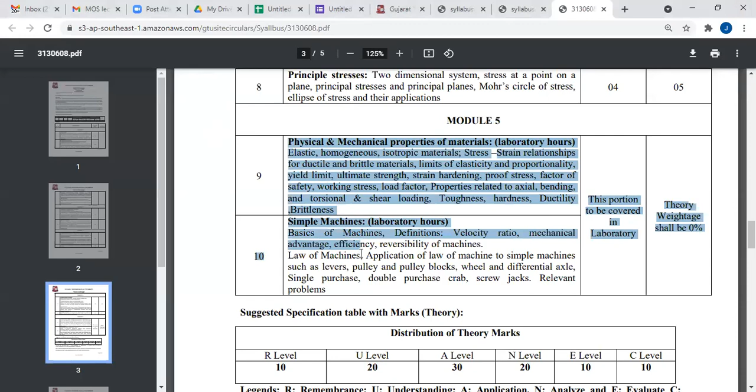So first, module number 5 is basically related to laboratory. How to conduct the laboratory works, that we will see later. Okay. So, fine. Let's see first of all module number 1. Before starting our subject, let's discuss the syllabus, so you know what you actually have to learn in this particular subject.

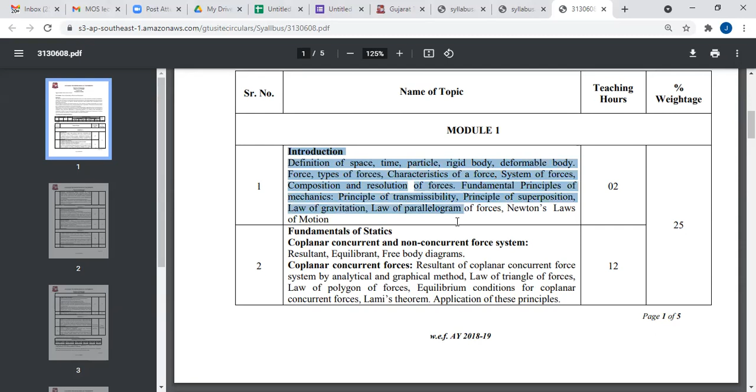So your module number 1 will cover the introduction part. What is force? What are the characteristics of force, system of force, and some basic principles. Clear? Second topic is your fundamentals of statics. It will be divided in 2 parts: coplanar concurrent and coplanar non-concurrent force system. So module number 1 basically covers the introduction part.

In that we will cover lots of definitions, and basically from this part 2 to 3 marks questions may be asked in the GTU examination. Module number 1, second part is most important: coplanar concurrent and coplanar non-concurrent force system.

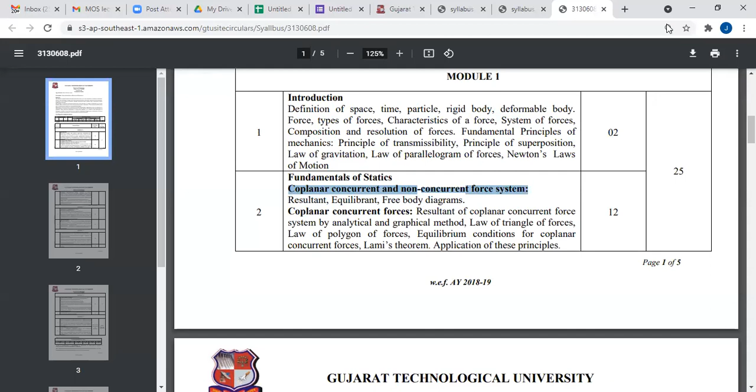Let me share the whiteboard. Is this whiteboard visible to all of you? Is this whiteboard visible to all of you? Yes, sir.

Now one more thing to all of you. Tuesday second lecture, that is MOS. Yes or no? Yes. Okay. Now Tuesday first lecture is my first offline lecture, and that timing is 9:45 to 10:45. And our lecture is also at 10:45. So we will not start our lecture at 10:45, but we will start around 10:55. Is it okay? Okay, sir.

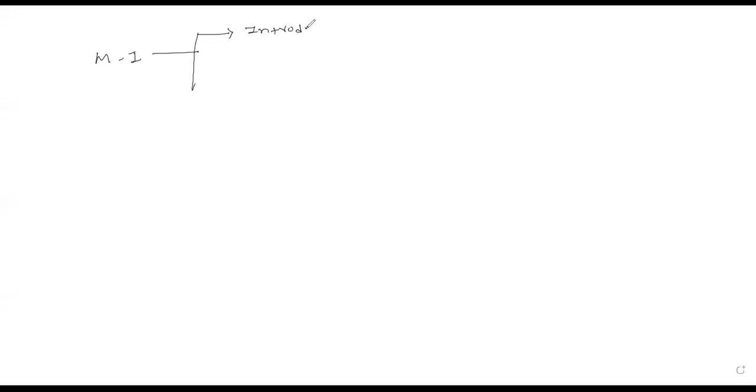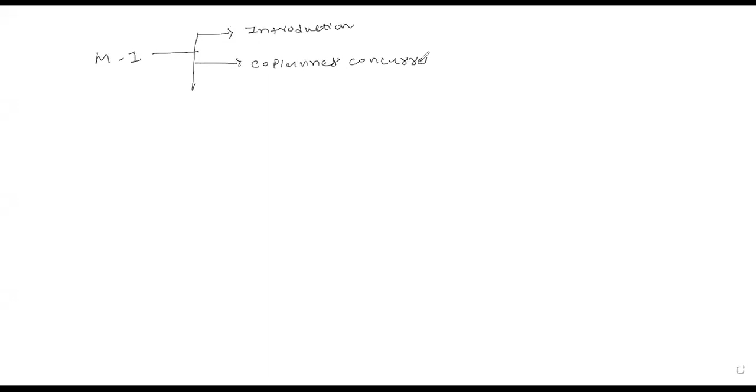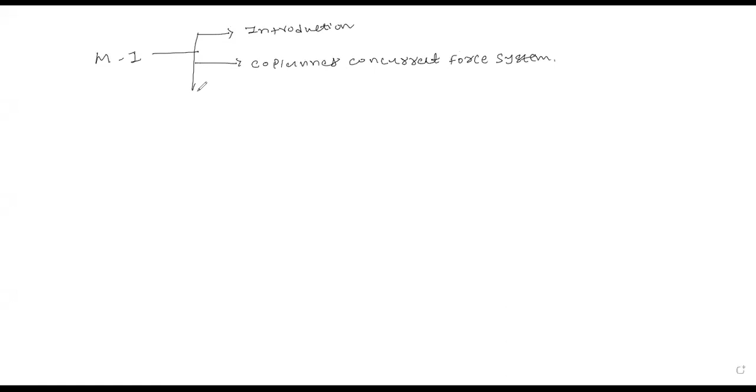Part number 1 is your introduction. Part number 2 is coplanar concurrent force system. And your part number 3 is the coplanar non-concurrent force system. Is it clear, students? Please confirm. Is it clear? Yes, sir. We have divided chapter number 1, or module number 1, into 3 parts.

Okay, whatever GTU says, forget it. So now, introduction basically covers 2 to 3 marks. No need to write. I will provide all the documents. Don't worry. No need.

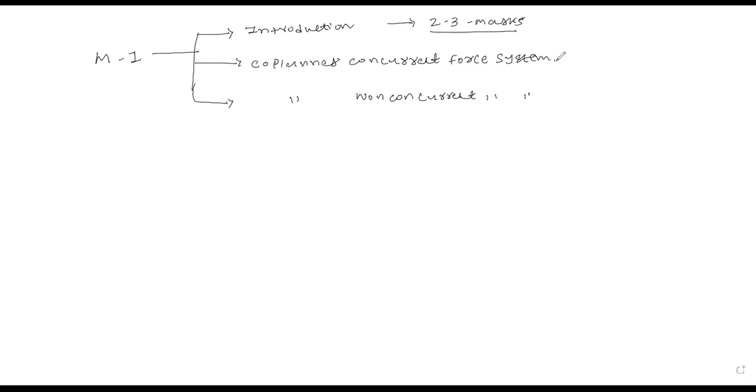Talking about coplanar concurrent force system, in coplanar concurrent force system we have many topics. So we discuss now only the topic names. Clear? First is the law of parallelogram. Second is the triangle law or law of triangle. Third is the resolution of force system. Fourth is Lami's theorem.

All 4 points are most important. You can ignore the triangle law because it's just like the law of parallelogram. So the most important topics are the law of parallelogram, resolution of force system, and Lami's theorem. Is it clear? Please confirm. Yes, sir. Fine. In coplanar non-concurrent force system, we have 2 parts.

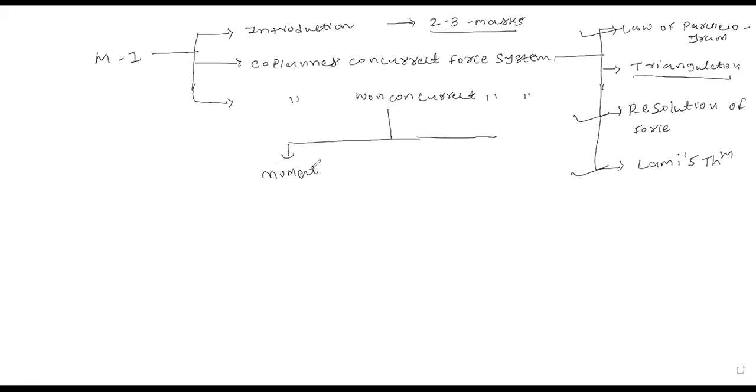First of all, we will learn what is a moment, what is a couple, and their difference. Questions are asked from this many times. Second, we will learn Varignon's theorem. That is nothing but your law of moment.

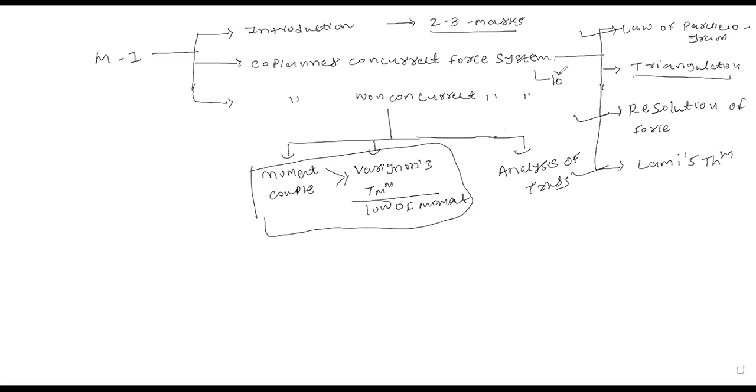So now, basically coplanar concurrent force system છે, એમાંથી 10 માર્ક નું પૂછાતું હોય છે. રેન્ડમ કહું છું, not a sure. ઓકે, અને આ બે ટોપિક માંથી બેઝિકલી બીજા 10 માર્ક નું પૂછાઈ શકે છે.

So now your total GTU paper is, તમારું GTU પેપર કેટલા માર્ક્સ નું હોય છે? 70 નહીં, ઓવરઓલ પેપર કેટલા માર્ક્સ નું હશે? ટોટલ પેપર વિથ ઓપ્શન 56? ના, ન્યૂ સ્કીમ ભૂલી જાઓ ભાઈ, જૂની સ્કીમમાં પાછા આવી જાઓ. આપણે જૂની સ્કીમ પ્રમાણે જ ભણીશું. પછી GTU ભલે વેટેજ ચેન્જ કરે, વેટેજ જ રહેશે, બરાબર.

નાઉ ક્વેશ્ચન નંબર 1, A B C 14 માર્ક નું હોય છે કંઈક આવું. ક્વેશ્ચન નંબર 2, A B, આ બધું 14 નું હોય છે. 7 7 7, yes or no? Yes sir. આવું ટોટલ પેપરનો માર્ક્સ નું સમેશન મારશો ને તો ટોટલ ક્વેશ્ચન પેપરમાં તમારા માર્ક્સ થશે 119 માર્ક્સ ઓપ્શન સાથે. ક્લિયર? ફોર એન એક્ઝામ્પલ ક્વેશ્ચન નંબર 3, 14 ની ઓરમાં 14 આવશે. ક્વેશ્ચન નંબર 4, 14 ની ઓરમાં 14, yes or no? Yes sir, 3 4 7 માં નથી જતો, બરાબર. અને સિમિલરલી ક્વેશ્ચન નંબર 5, 14 ની ઓરમાં 14, તો 28 28 56 56 28 કેટલા થાય? 84 84 પ્લસ 14.

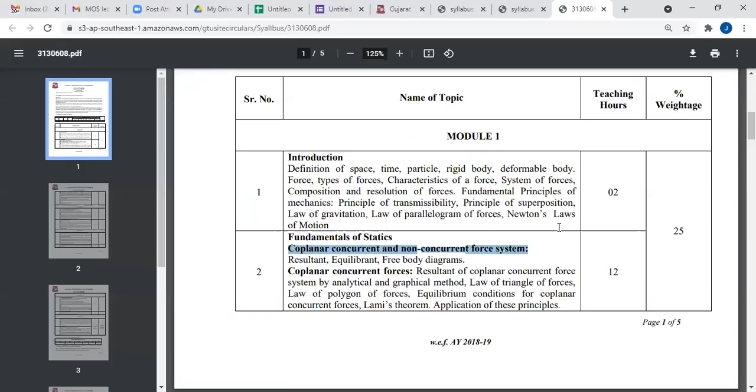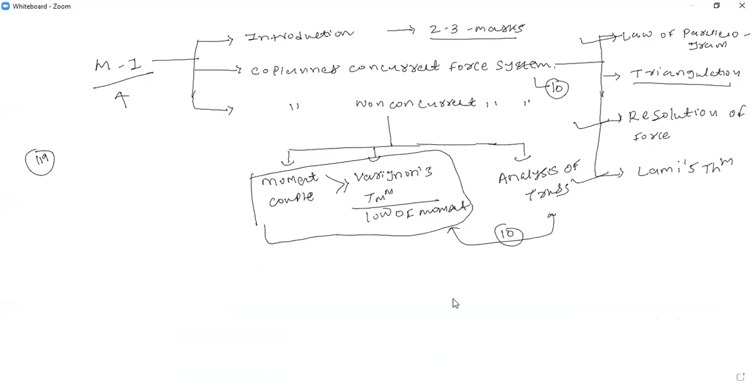Yes, clear? Now why I am discussing this, your module number 1 having some weightage, okay, as per GTU syllabus. Let's see that weightage. 25%, is it clear? Weightage is 25%. Clear? Okay yes sir. Now, 119, that means can I say that 120 marks? 120 cut 25%, that means કેટલું હશે? કરો કેલ્ક્યુલેટ. 30, 30 માર્ક નો આવશે, બરાબર.

So your module number 1 belongs to 30 marks. ટ્રસ માંથી ઘણીવાર સ્પેસિફિક ક્વેશ્ચન પૂછાય છે, so you can say here 7 to 8 mark question. So તમને 30 માર્ક મળી જશે આમાંથી. Clear? Please confirm me. Yes sir. Okay, so now this subject is basically taught by two faculty. One is myself Jay Patel, and second is Alpesh. That is 3 lectures with me, and 1 lecture is Alpesh. So now this module number 1 will be covered by me, આખું ટોપિક હું તમને સ્ટડી કરીશ. Is it clear?

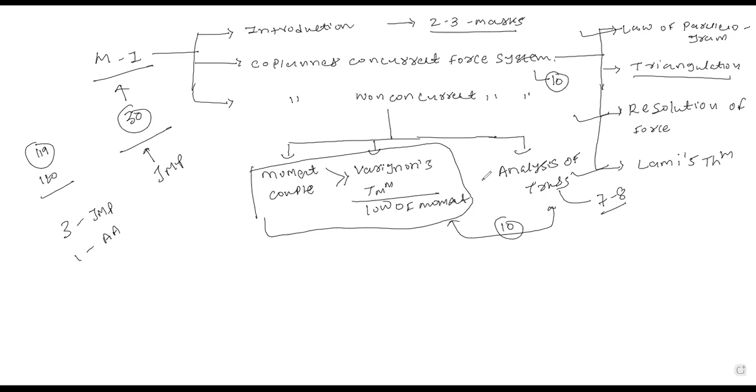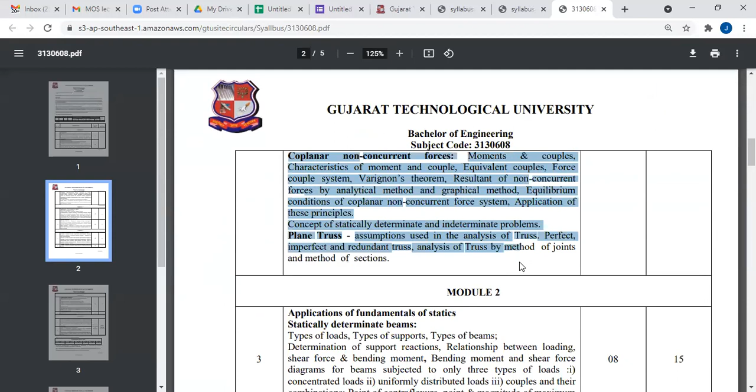चलिए सेकंड मॉड्यूल में डिस्कस करते हैं. सेकंड मॉड्यूल नंबर 2, that is the most important topic, that is આ બધી વસ્તુ આવી ગઈ. મેં તમને પહેલામાં સમજાવી દીધું શું સ્ટડી કરવાનું. That is the application of fundamental of statics. Okay, and in that we will learn types of beam.

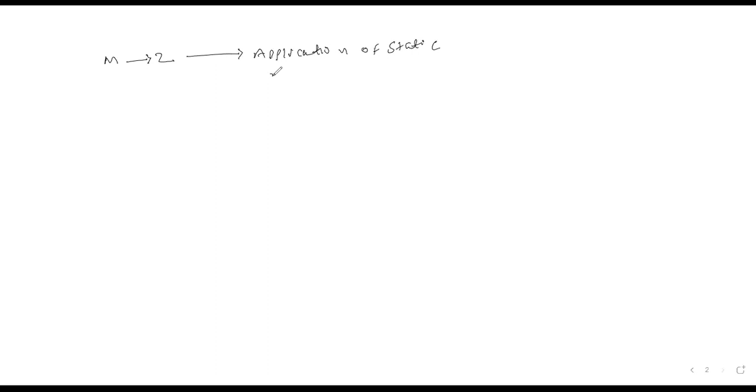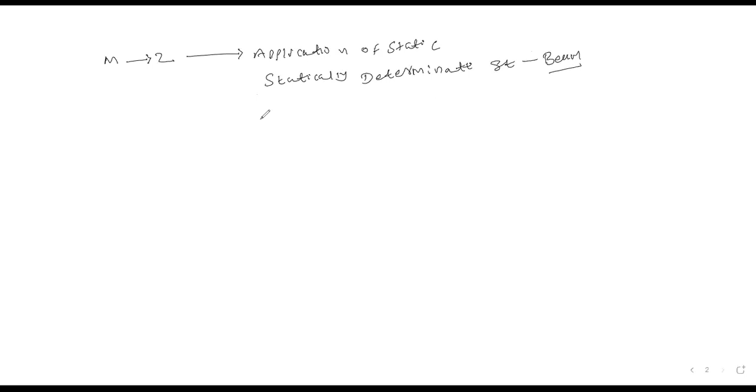So let's discuss on whiteboard. So module number 2, in module number 2 we will learn application of static. In that we will learn statically determinate beam, statically determinate structure. Now lots of kinds of structure are there, but in particular mechanics of solid subject we will learn only beam. Is it clear? We will learn only beam. What is the beam? Don't worry, I will teach you later. Yes or no? In this chapter we will learn first of all support reaction calculation.

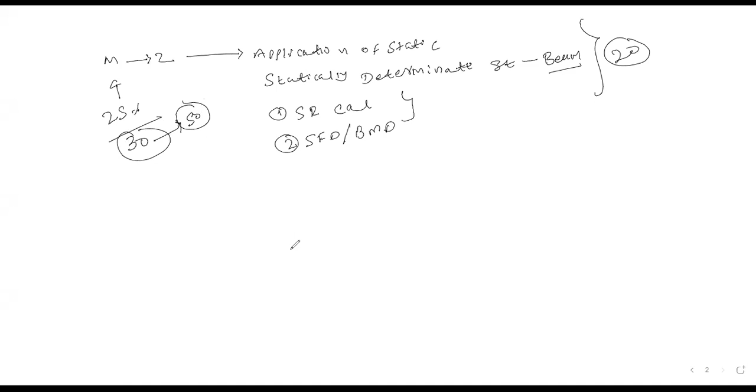Okay, so now, from my point of view, this chapter is not 30 marks. This chapter is more than 30 marks. 50 marks નો આ chapter છે. You got my point? 50 marks નો આ chapter છે. ડાયરેક્ટલી નહીં, ઇનડાયરેક્ટલી કરો છો. વાવ, ચલો એના આપણે ડિસ્કસ કરીએ. કઈ રીતે 50 marks નું ચેપ્ટર થાય છે એ પણ ડિસ્કસ કરીશું લેટર ઓન.

So this is your module number 3. Same topic, I will cover it. It's covered by me.

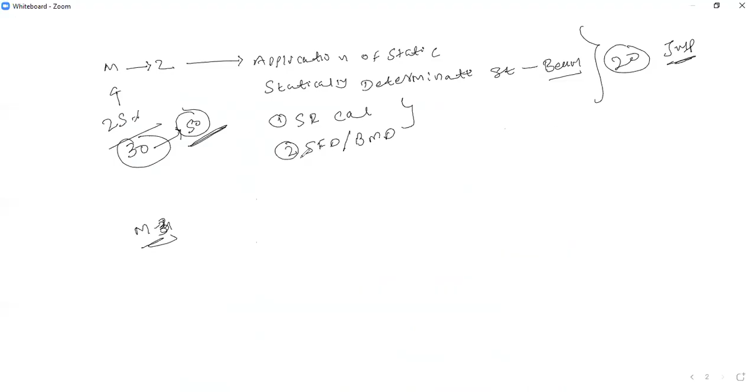Module number 2 has two parts. This is part number A and part number B. Part number B is nothing but stresses in beam.

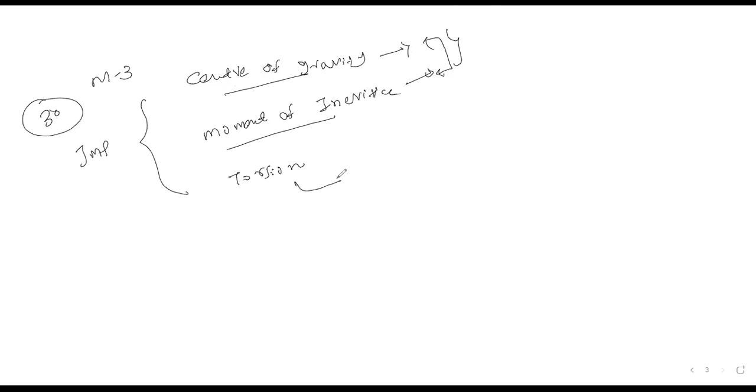It's a 30 mark total module. Out of that, torsion is hardly 4 to 8 marks asked. Apart from that, everything is center of gravity, moment of inertia. Is it clear or not? Please confirm.

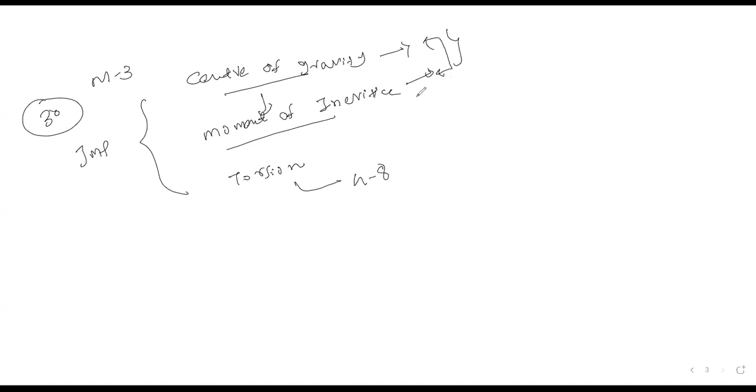Yes sir, yes sir, center of gravity and moment of inertia both are interrelated. If center of gravity comes to you, believe me, moment of inertia is 80% complete. If you have learned center of gravity, moment of inertia is 80% complete. Is it clear? I will simplify the subject for you.

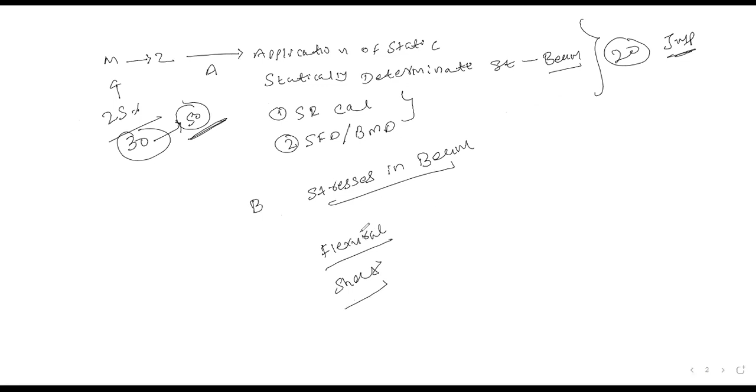Just read this name only. Okay, we will discuss that in detail. Now, to learn flexural stress and shear stress, you must know moment of inertia, and to learn moment of inertia you must know center of gravity as per our discussion. Yes or no?

Please confirm me. Yes sir, right? Sure. Now again in this chapter we need calculation of support reaction as well as SFD, BMD, shear force and bending moment diagram.

So can I say that if you are able to learn, or if you have got some fundamental concept of the statically determinate beam, that is support reaction, SFD, BMD, and you are getting 100% complete information regarding center of gravity and moment of inertia, your 80% application is complete. Yes or no?

Yes or no? Yes. Okay, so you need to learn this chapter only 20%. If you are able to solve SR calculation and SFD BMD, and if you are able to calculate MOI and CGs, moment of inertia and center of gravity, you have already completed this chapter 80%. You have to learn only 20%. Is it clear

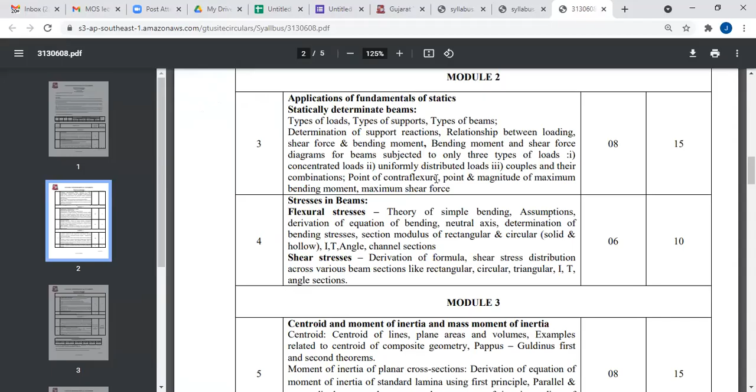So this is your syllabus: center of gravity, moment of inertia, torsion, and this is the syllabus of simple stress strain and principal stress strain. So each and every module is having 25%.

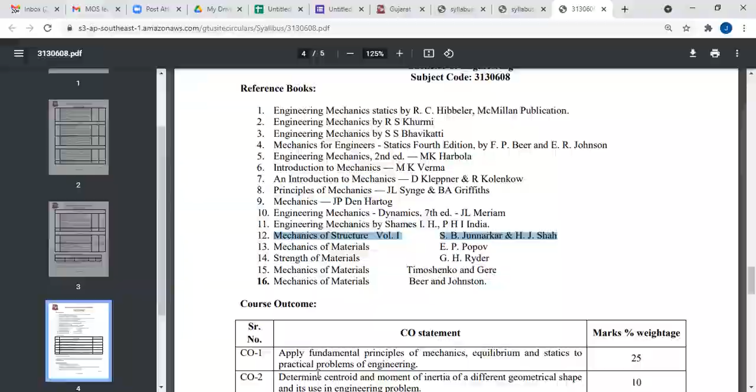Okay, but in my portion, you will not require any books. If you attend all my lectures regularly and follow my notes, you will not require any books. Clear? My class notes are more than sufficient for all of you.

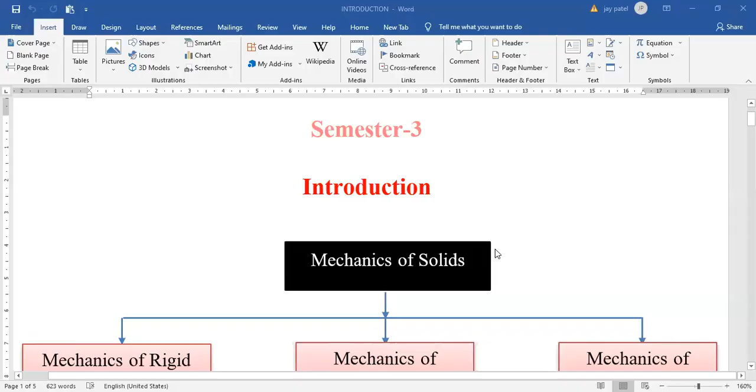Is my screen visible to all of you? Yes, sir. Okay, so let's cover some small introduction.

We won't cover much, just a little bit. So, introduction: first of all, mechanics of solid. Basically we will divide mechanics of solid into 3 parts.

You can see here from the flowchart. We can divide mechanics of solid in 3 parts: mechanics of rigid body, mechanics of deformable body, mechanics of fluid. Now, can anyone tell me what is rigid body, what is deformable body?

We will not discuss mechanics of fluid in these particular sessions, because mechanics of fluid is itself one subject. So we will cover only mechanics of rigid body and mechanics of deformable body. Now, can anyone tell me what is rigid body?

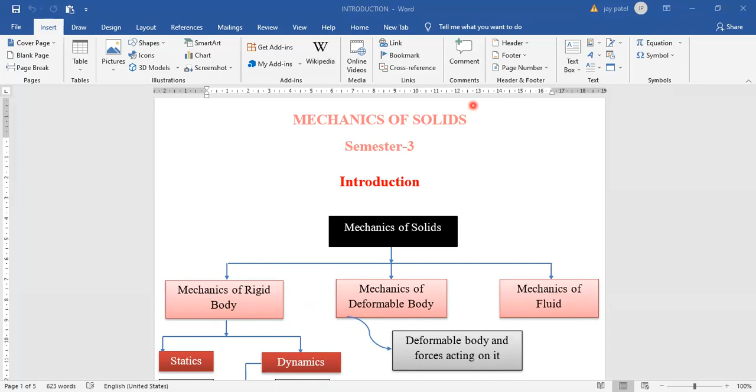Rigid body: it is an idealized body composed of a large number of particles, all of which will remain at a fixed distance from each other. In other words, a body is said to be rigid if relative distance between particles of the body remains same before and after application of force.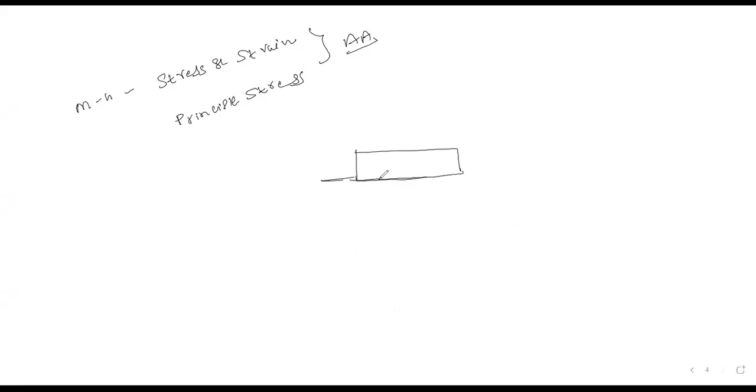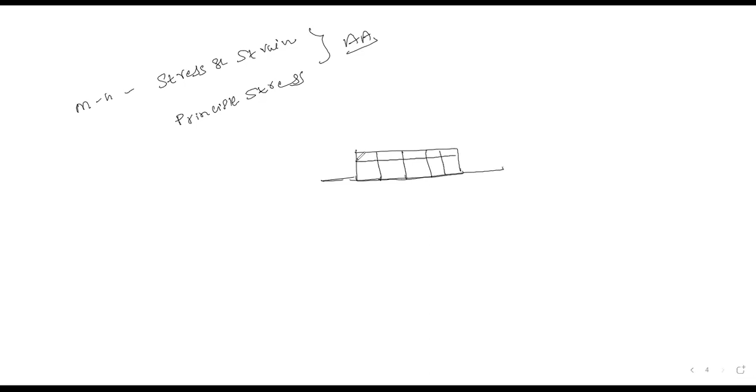Now, can I say that this body has n number of particles? N number of particles, or can it be divided into n number of parts? Yes or no? Yes.

So can I say that this is your point A, this is your point B. Your body is a rigid body. Which kind of body is known as a rigid body?

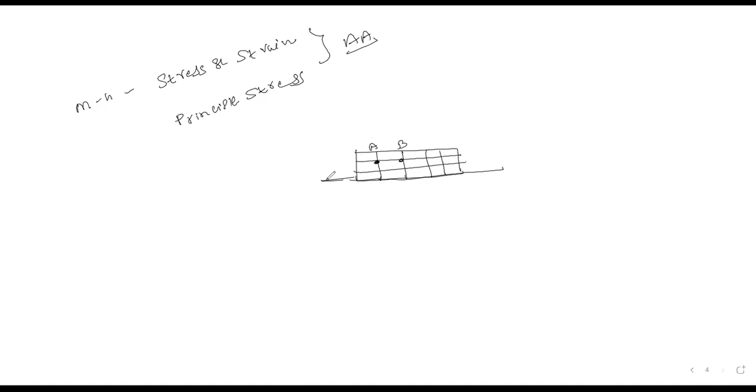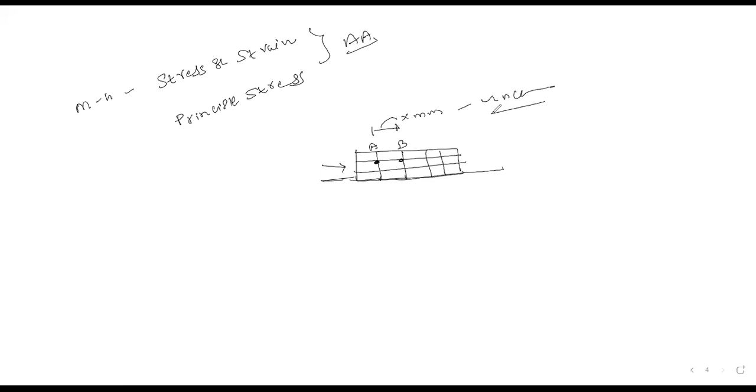Suppose if I am applying the force, okay, whatever load is applied, the relative distance between these 2 points, say x mm, will remain unchanged. It will not change before and after application of force. Such kind of body is known as a rigid body.

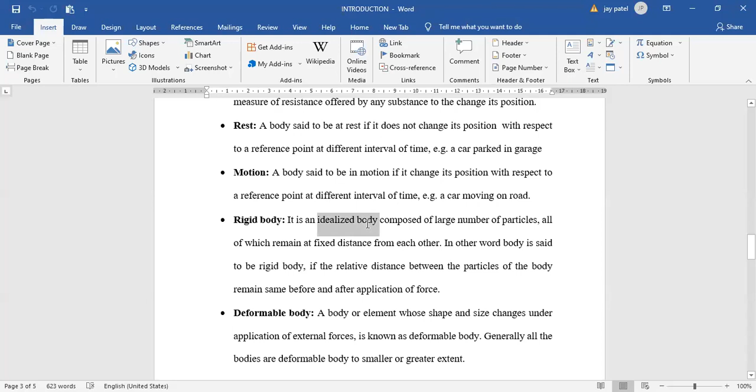It is an idealized body. Now it is not actually possible in real life. That's why we are saying idealized body. Composed of large number of particles, it could have n number of particles.

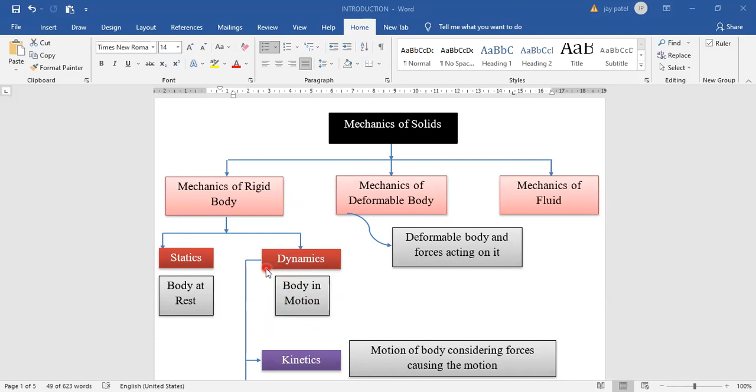Now again, dynamic is divided into two parts. One is kinetics and second is kinematics. Kinetics and kinematics નામ સરખા જેવા છે પણ બંનેનો ટર્મિનોલોજી ડાયનામિક્સ પર ડિપેન્ડ છે. Either I am considering kinetics or kinematics, your body is in motion. Yes or no? Yes, sir. But there is some difference.

Motion of body considering the force which is responsible for that particular motion, that is called kinetics, and motion of body without considering the force causing the motion, that is called kinematics.